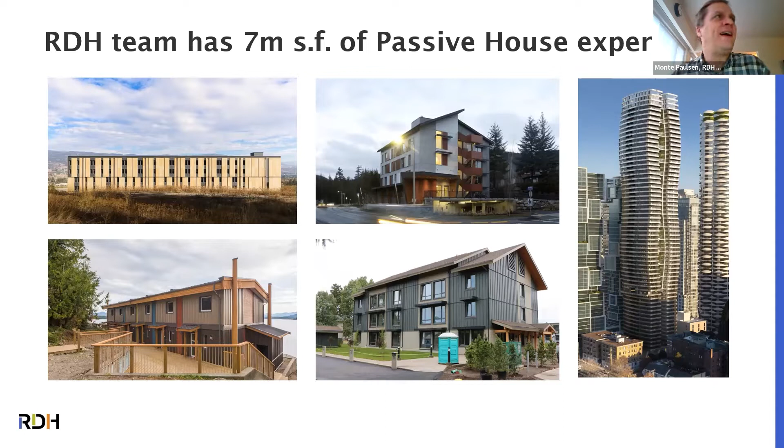As Ken mentioned, we're up to about 7 million square feet of passive house. We've been doing a lot of work over the last few years, and if you'd asked me a couple of years ago, I kind of felt like the work we did on new passive house projects was making a difference around climate. But these last 6 months here in British Columbia have changed my perspective. And I'm really focused on this question of how and why we need to retrofit buildings in a climate emergency. So I'm going to talk briefly about climate, about what's happened here in the last 6 months and what we've learned from that. The core message here is that every building needs a plan. And then we're going to talk about how Stepwise EnerPHit helps you organize a plan if you haven't done this before.

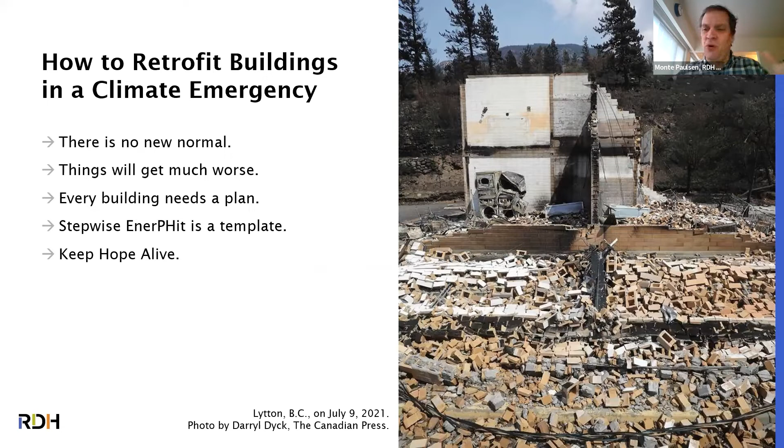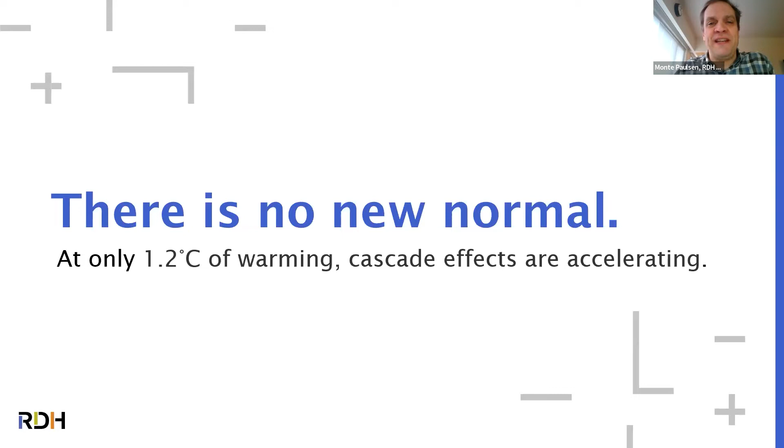If you take nothing else from this hour, there is no new normal. If you hear someone say, oh, this is the new normal, realize they're missing the point. There is no new normal. There is no stable point. This is not anywhere near stable. We are just at the very, very beginning stages of a new geological epoch.

The Earth has warmed 1.2 degrees. Land areas have warmed 1.8. That Earth total includes oceans. And Northwest Canada is warming faster than North America. So let's look at what's happened here.

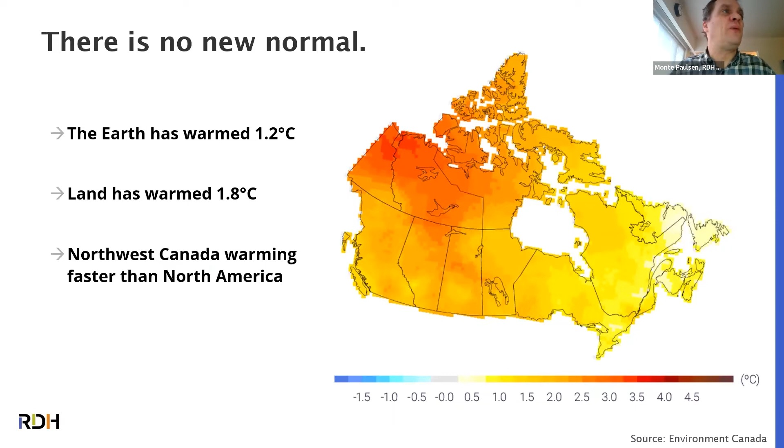It really all started with a little bug for us, and that's how climate things start. The mountain pine beetle started moving in at around 0.6 degrees. We were half what we are now. All that happened was this bug had always been here, but most of them would die in the winter because it got cold enough. They'd freeze in the winter, and a few would survive the next year. But as it got just a little bit warmer in winter, the bugs lived through the winter and started killing trees en masse because they just populated and populated and populated.

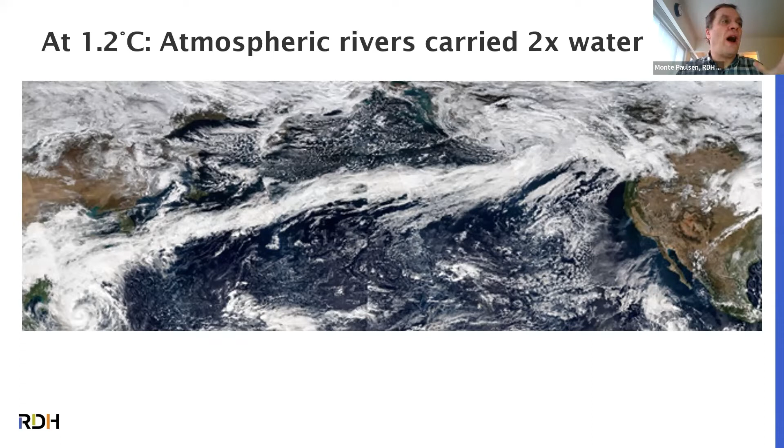This fall, just a few weeks ago, we started seeing much wetter atmospheric rivers. We've always had these weather patterns, this is why salmon spawn in the fall, but they were carrying literally twice as much water as they used to. Why? Because a given volume of air, when it's hotter, around 20 degrees, than down around 10 degrees, which was more normal just a few years ago, can carry twice as much water. And we were setting temperature records because of this, up in the 21s, 22s, huge amounts of water.

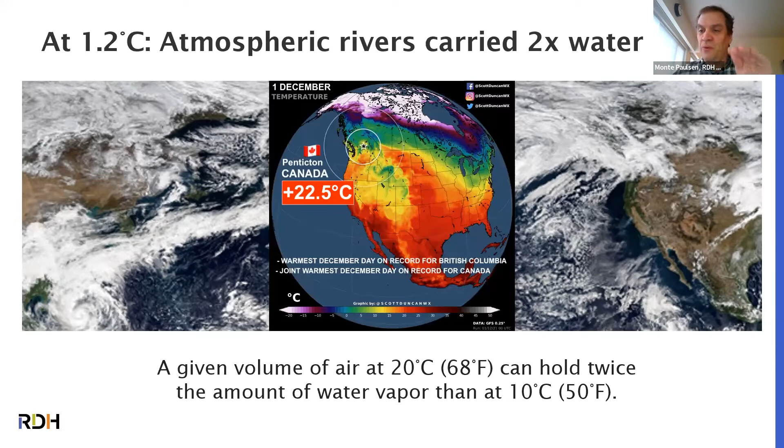So what happened is the water came through the forest that had either been burned by fires or clear cut, and created avalanches everywhere. So there was this connection between the bugs, to the dead forest, to the fire, to the avalanches. And the avalanches were huge.

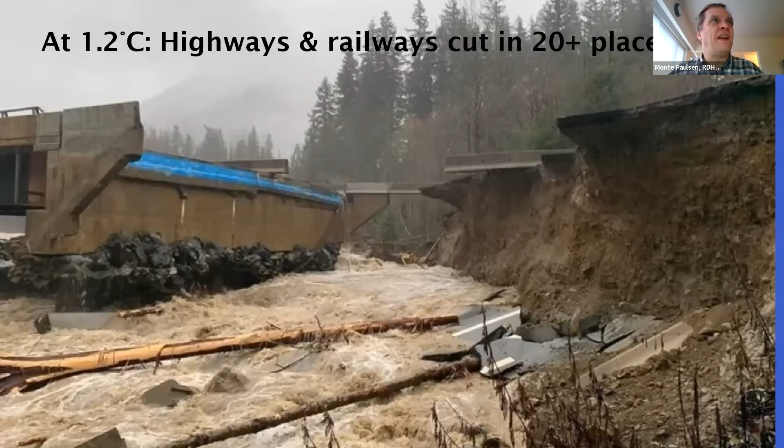We cut all of our roads to the rest of Canada, more than 20 deep cuts like this. This is our primary highway to the rest of Canada. There are dozens of cuts like this. We won't have our primary highway open until next summer at the very soonest, and it won't be a high-speed road. It'll be little makeshift bridges around all of these pieces.

At this point, the only way goods get in and out of Vancouver from Canada is a one-lane road through the mountain. They run about one lane for trucks in one way, one lane for trucks the other way, and they're still not letting private vehicles on.

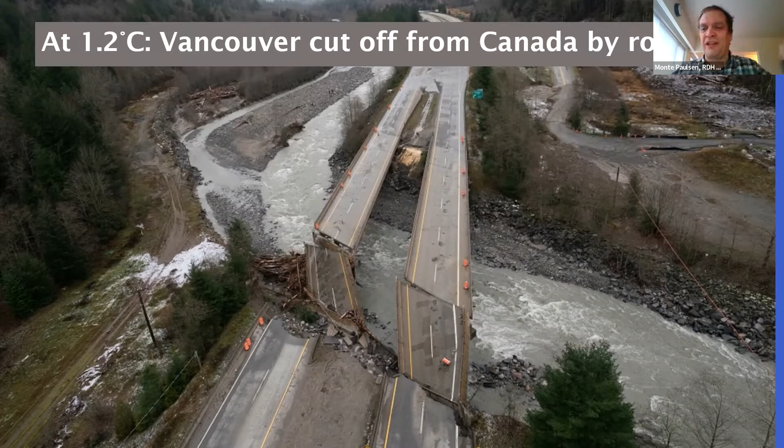And then all that water flows downstream, and the Fraser Valley, which is our primary food area for this part of the world, flooded three times in three weeks, 300-year storms in three weeks. More than 6,000 farm animals died that we know of. We're still sorting and counting to figure out what happened. It's billions and billions of dollars of damage.

And it's funny because the people who live in this region tend to be very conservative, they tend to vote very conservative. This is sort of a middle-class farming community. Many of them don't believe in climate change, but it doesn't matter, they're dealing with it. It doesn't really matter what you believe. The fact is, it's happening to everybody, and it's happening faster and faster and faster.

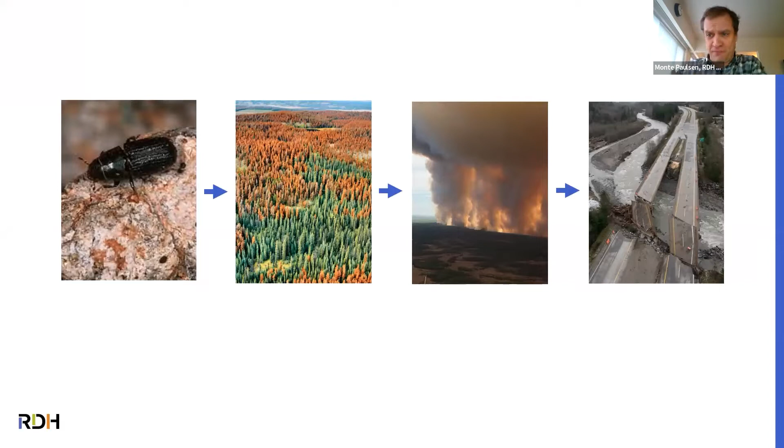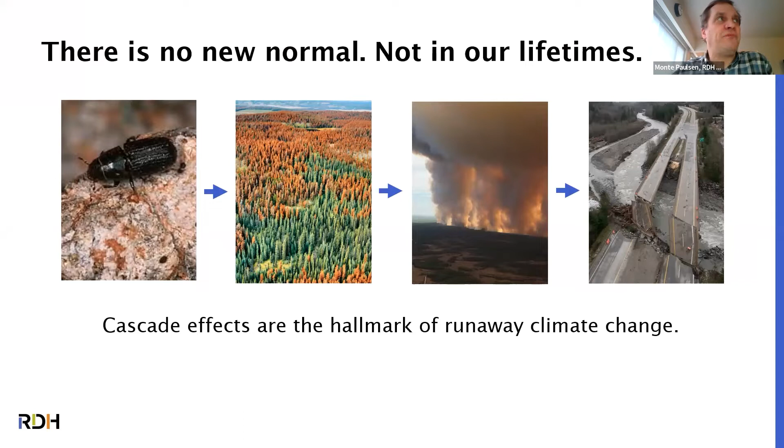So I want you to just take away this idea of cascade effects: bugs to dead forests, to fires, to landslides. This is exactly what runaway climate change looks like. It's these cascade effects, it's not one thing, it's the way they add up on each other. And it's really important to start understanding these cascade effects are running faster and faster and faster. One thing is piling on another, and there will be no new normal, not in our lifetimes.

I urge you to think about what the cascade effects are where you live. These are the cascade effects where I live, and it's worth knowing these, but the cascade effects are different wherever you are.

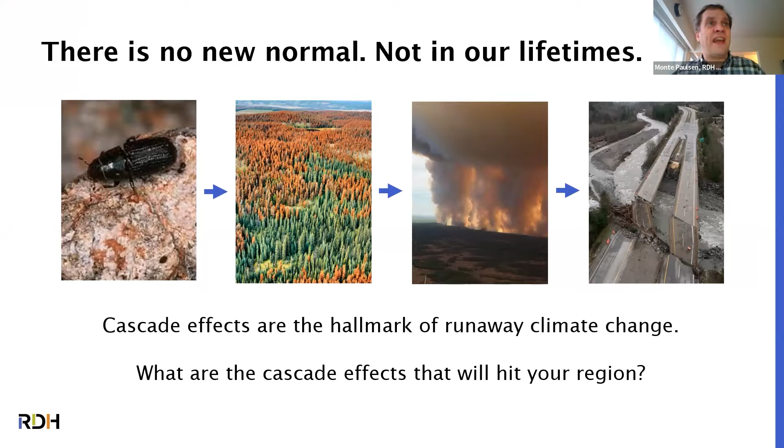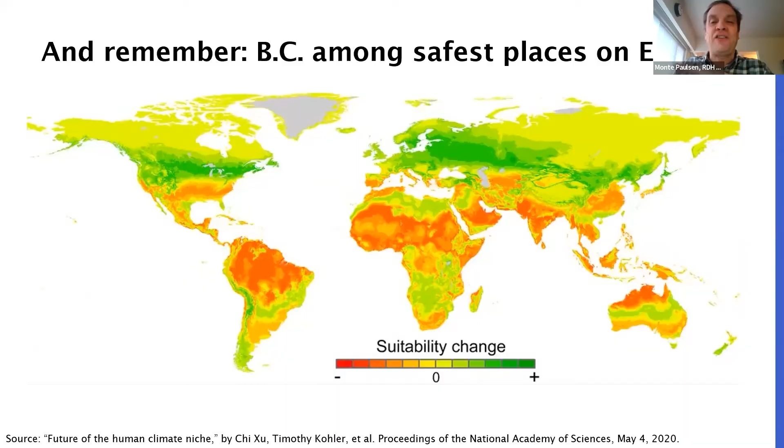And remember, BC is one of the safest places on earth. We have it easy, we are one of the most resilient, long-term safe places anywhere. The vast majority of the rest of the earth, as climate change and the cascade effects happen, would love to have the amount of water that we're dealing with. Roughly 3 billion people will have to migrate by mid-century. So even as I describe this, I'm really aware we have it easy.

Second point: things are going to get worse, way worse. We were looking at 1.2 degrees here in BC, we're headed towards 2.6 degrees or more. The amount of heating we're putting in the atmosphere is equivalent, just for the oceans part, of 5 nuclear bombs a second. By the time we finish this one hour event, it will be the equivalent of 18,000 nuclear bombs of heat exploded in the ocean, just in this hour. That is more than we currently have in nuclear warheads on the planet.

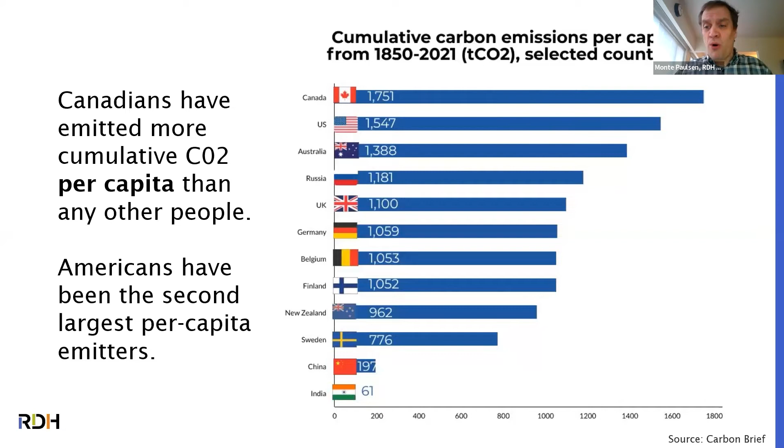And Canadians, Americans are heavily at fault, we have emitted more per capita than any other nation. So when you look at these big global targets you've probably seen, 2030 half emissions by 2030, 2050 net zero, politicians have really grabbed onto this idea of net zero by 2050. Realize it's bullshit. 2050 net zero does not save us at all, it's just been a handy political target.

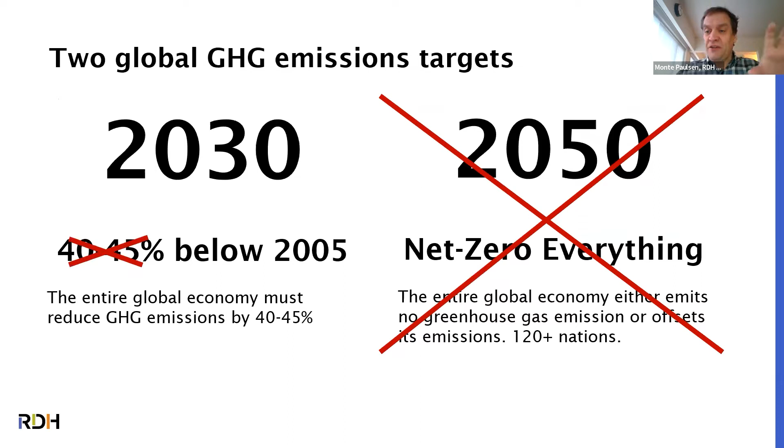And frankly, only 50% reduction by 2030 doesn't save us either. These targets that are thrown around politically, that you're hearing in the news all the time, are nowhere near sufficient. Let's talk about why for a minute.

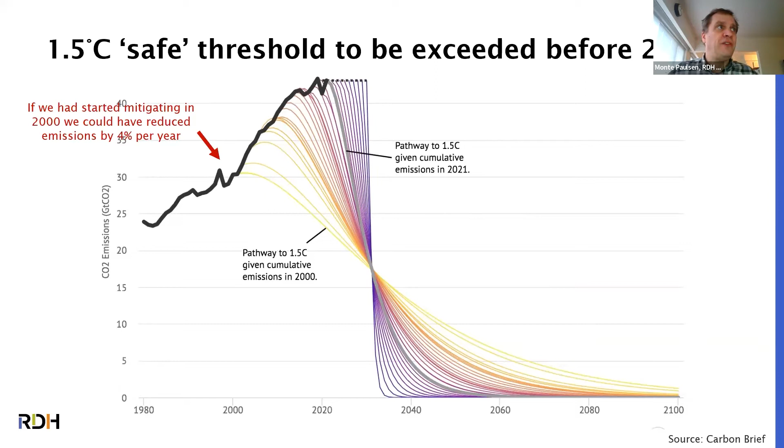If we had started reducing back in 2000, we could have reduced emissions at the rate of about 4% a year. But we didn't do that. We added an extra quarter of emissions in the last 20 years. Things went up faster in the last 20 years than they had prior to that, and they're still going up faster.

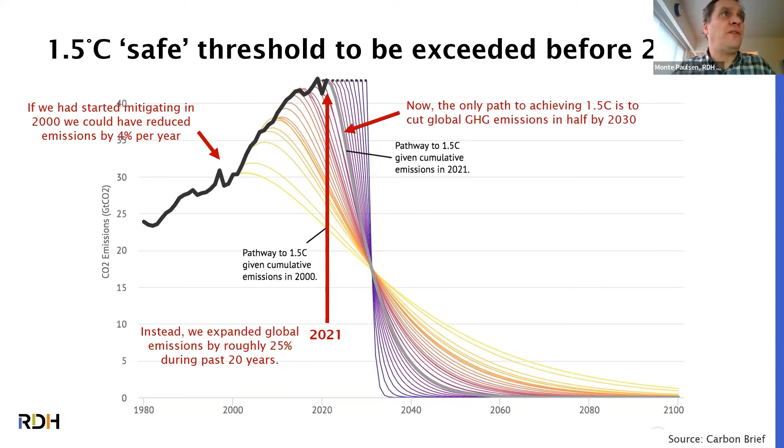So our situation is far more dire today. The pathway to keeping a 1.5 degree warming world involves the steep, steep gray line you see going down there. Each year for the next few years to 2030, that line gets steeper, till the point it'll start to invert. So 2030 is the real tipping point. If we have any hope of keeping a somewhat livable climate, a climate that's just a bit worse than what we have now, that's 96 months away. 96 months to change the world.

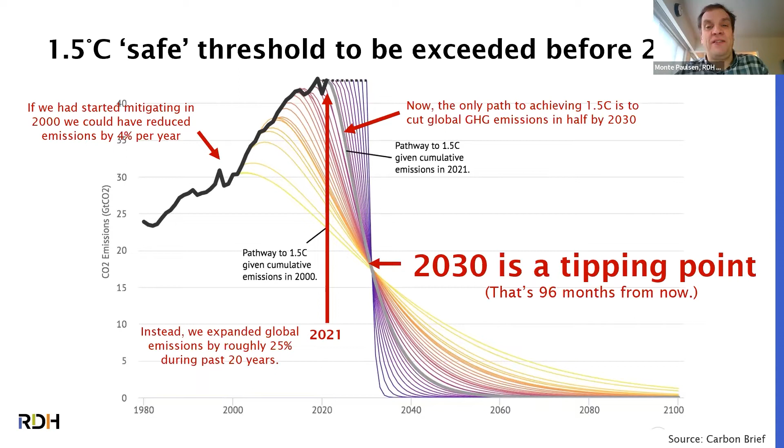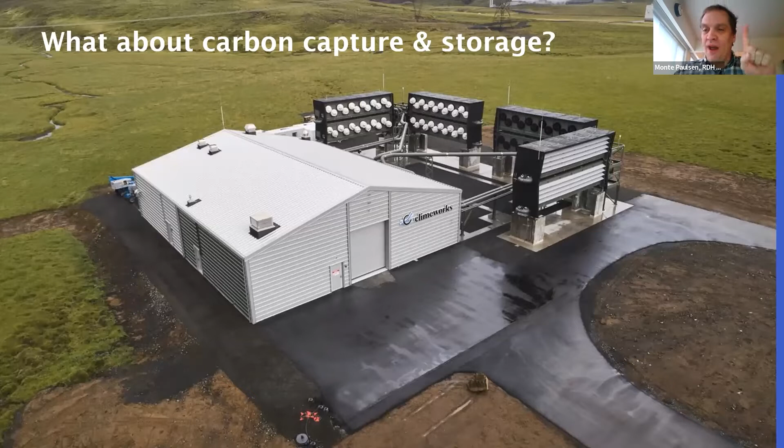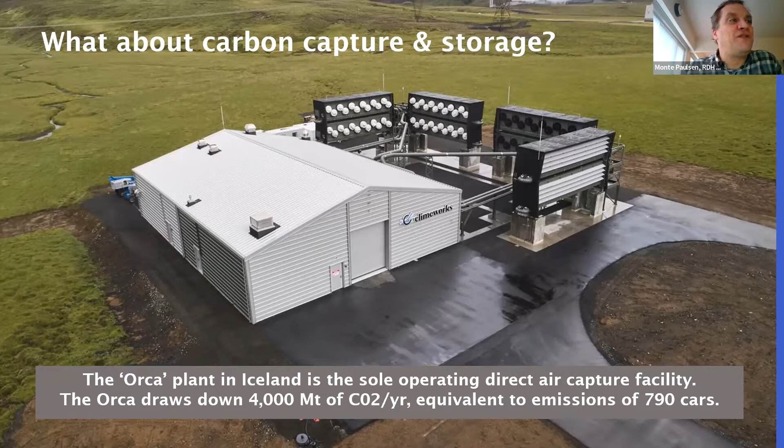Now, some people ask, what about carbon capture and storage? It's true, there are scientific ways to do it. This is it, this is the only plant on Earth that does it. We have one, grand total of one plant. It's a really cool plant, in Iceland, run by a great company doing some fantastic engineering. But we could never build enough of these to capture those atomic bombs worth of heat we're letting off every day. So it's definitely a technology worth exploring, but literally one plant that can do the equivalent of 790 cars is not going to save us.

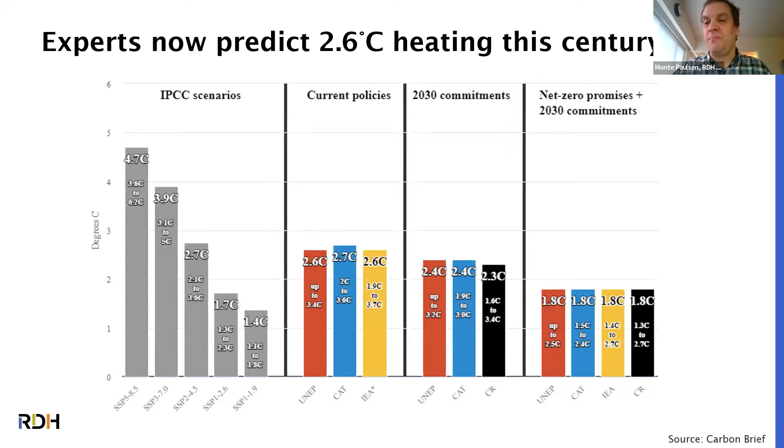And so experts, after the COP meeting a few weeks ago, are now predicting about 2.6 degrees this century, based on what we understand now. That's the most reasonable target of the moment. Really depends on what happens in the next few years.

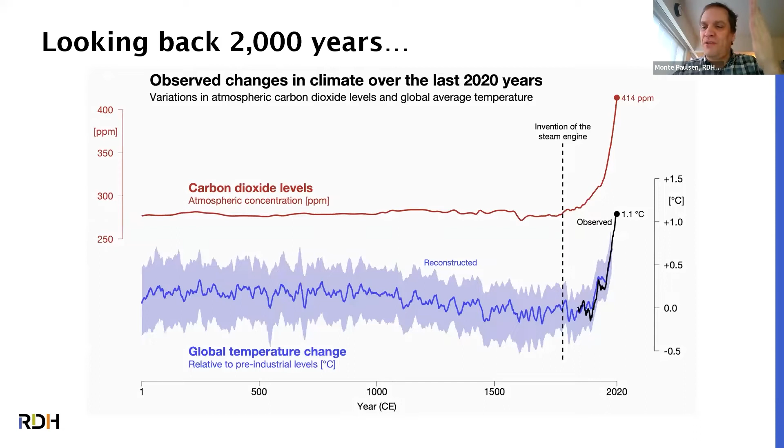You've seen this graph where carbon dioxide levels and temperature start to shoot up, the so-called hockey stick graph. Just before we get to retrofits, I want you to look at this graph longer term with me. So this is the same graph. Right here on the right is now. We're making these steep rises. This is civilization as we know it, the last 2,000 years or so.

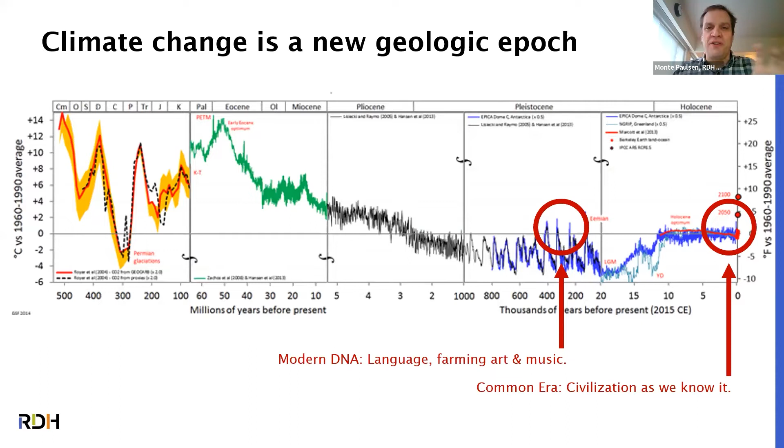Back here in the Pleistocene is when modern human DNA arrived. You could take their DNA and our DNA and match it. It's when language emerged, farming emerged, art and music emerged. Many of the things we think of as civilization happen around this time. And back here in the Pliocene was when early ape-like ancestors, not quite humans, started living in groups and using tools in ways that mattered.

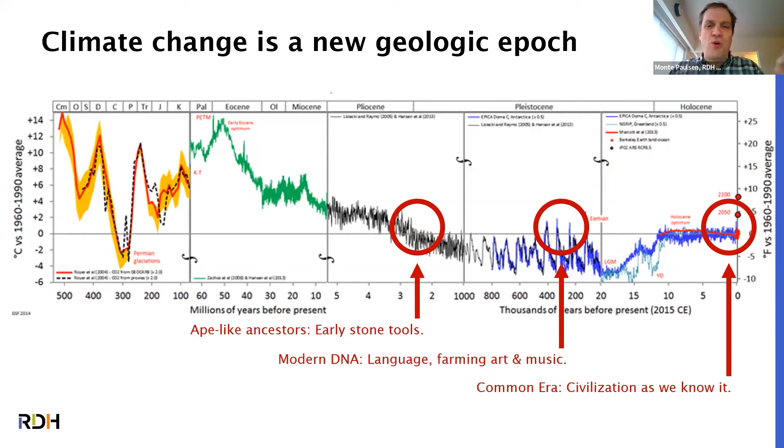Note that through all of that time, the temperature was about the same, or a little bit below where we're at now. There has never been a human alive on a 2.6 degree hotter planet, ever. If you look at that line that's about 2.6 degrees, you'll notice everything before that was before there were any humans. So if you hear people say, oh, the Earth's been hotter before, yeah, but never when humans lived here. We have no idea how to live in this environment. The entire time it was like that, there was nothing remotely like us as mammals on the planet.

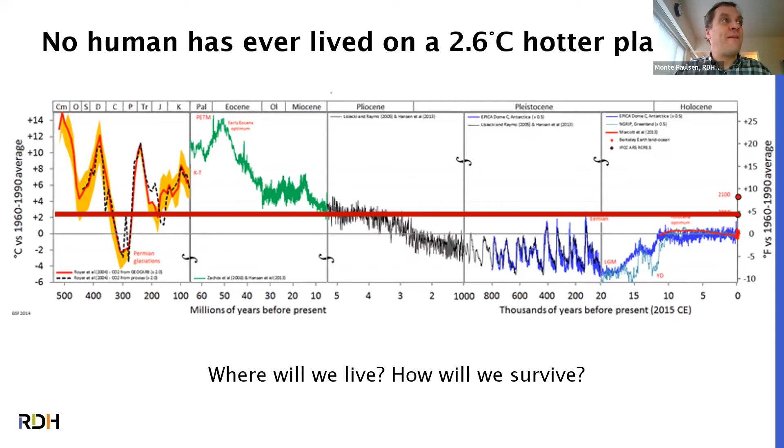So the real question is, as we go through this, as we approach 2.6 degrees, or perhaps worse, go past, how are we going to live? How are we going to survive? How are we going to make it? And that's why every building needs a plan. We actually need to think of buildings as survival shelters for an incredibly more dangerous world.

There's two concepts to take away. Most of you have probably seen it, but adaptations: buildings need to shelter people on a 2.6 degree or greater planet. And mitigation: buildings need to emit nothing, nothing to prevent a 2.6 degree planet.

Our premiers, like our premier here in British Columbia, said, oh, when these floods happen - this is a guy, nice guy, I like John - these are extraordinary events, not measured, not contemplated. The problem was his own government issued a report in 2019 that contemplated and warned about these exact cascade effects. They said what happened, the cascade thing, is exactly what they told us would happen. They warned us specifically about wildfires and smoke, extreme storms, overland flooding, sea level rise, and overheating. Exactly what we've seen has been warned about.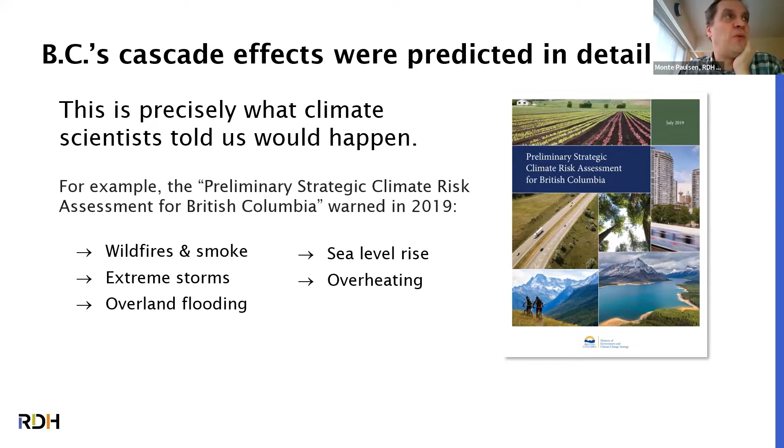Again, I'd urge you to study and figure out what the cascade effects are in your region. And here's the thing: architects and engineers are legally responsible.

We can get sued. We've been warned by the government. Our own engineering associations have said climate change imposes a new and evolving pressure on the standard of care. Specifically this year, there's a climate change action plan by engineers here in British Columbia that says registrants are expected to consider the impact of their work on the climate.

So here's the point I'm trying to make. Politicians in both countries can pretend they didn't know - oh, what happened, didn't know that was coming. We can't. We are legally responsible, those of us who work in buildings, and we need to consider our legal liability as well as the survivability of our buildings.

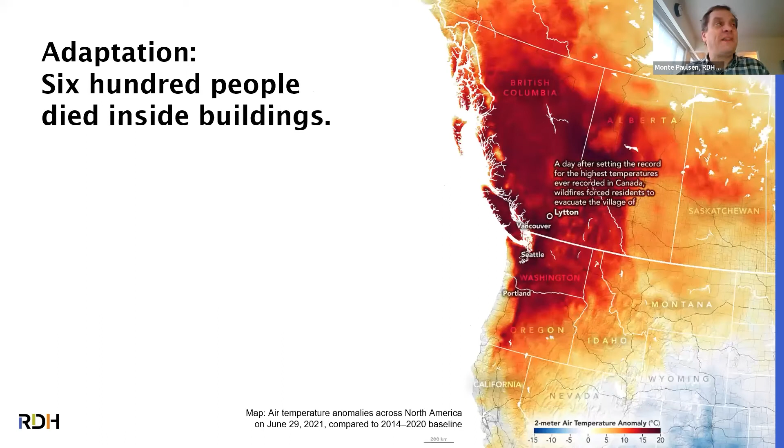So let's talk about that directly. In that town of Lytton, when it burned, those same few days we call the heat dome of 2020, we had a record high of about 49.6 C. I think that's in the range of 120 F - I'm sorry, I can't do the number conversions in my head.

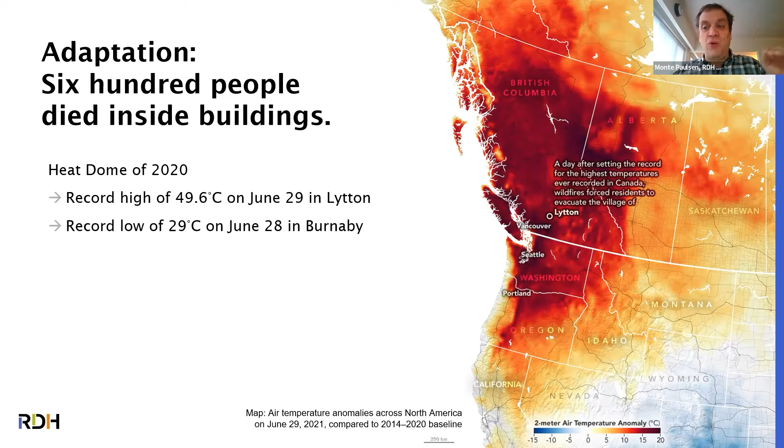More importantly, our lows didn't go very low. So as the lows stayed high, our buildings didn't cool off at night, and they just built heat for 2 or 3 days. There were approximately 600 people who died from heat-related causes - the coroner determined this was a heat-related death during that time. The vast majority, more than 90%, were seniors, and 99% of them died in their own homes, the rest in places like hotels or police stations.

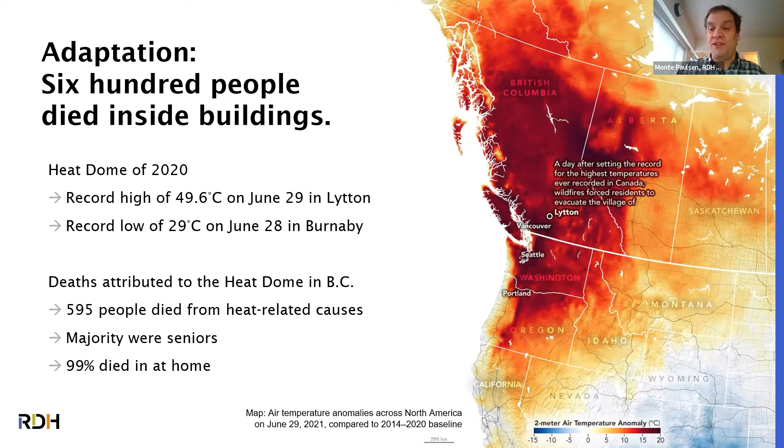So people were dying at home during this heat wave. The possibility for legal liability going into the future, where as we build buildings, people literally go home to seek shelter and die, is very real.

And what we know is that there are at least 6 factors that affect overheating, and we tend not to look at them. It's about solar gains, of course - we talk about that a lot at Passive House - but the temperature outside matters too. And we need to model everything for 2050 and 2080 climates.

The urban heat island effect is very real, and we tend to build multi-unit housing in places that have more urban heat island effect. As we build smaller units, the occupant density creates more internal heat gains per square foot or per square meter of building. We also have more and more losses from these aggressive domestic hot water systems and other mechanical systems.

And we have these huge lifestyle variations. Some people have these huge gaming machines in their apartments that put out 1,000 watts per unit in real time, completely changing the energy balance of those buildings. We need to be looking at all of these factors.

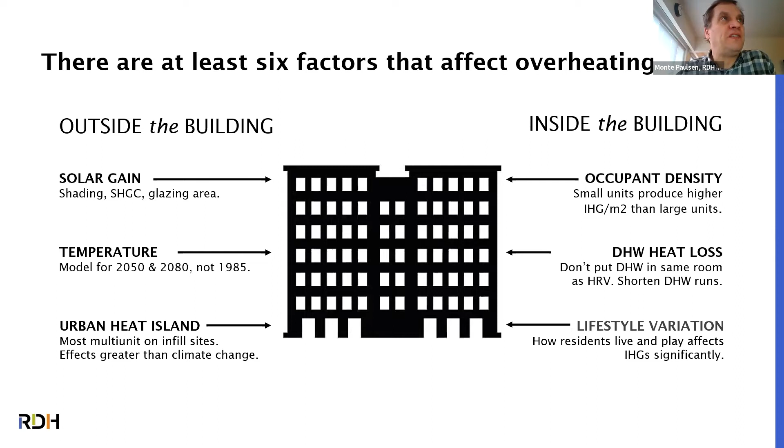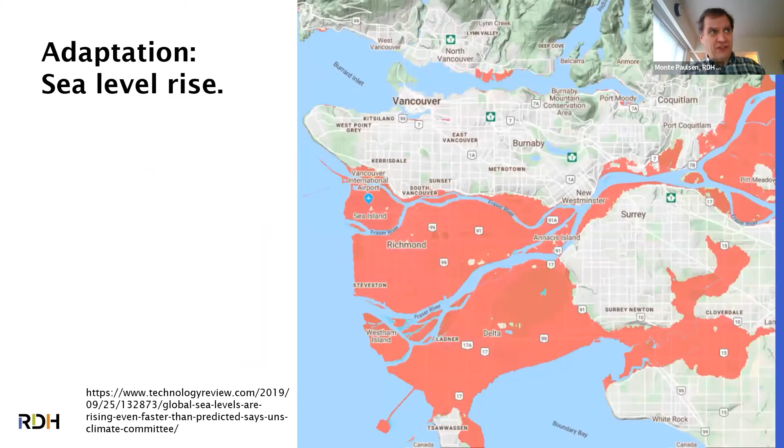And of course, sea level rise. This is what it means to my area, Vancouver - huge storm surges in a few more years with 1 meter of rise. But frankly, places like Boston and New York are looking at far worse sea level rise scenarios.

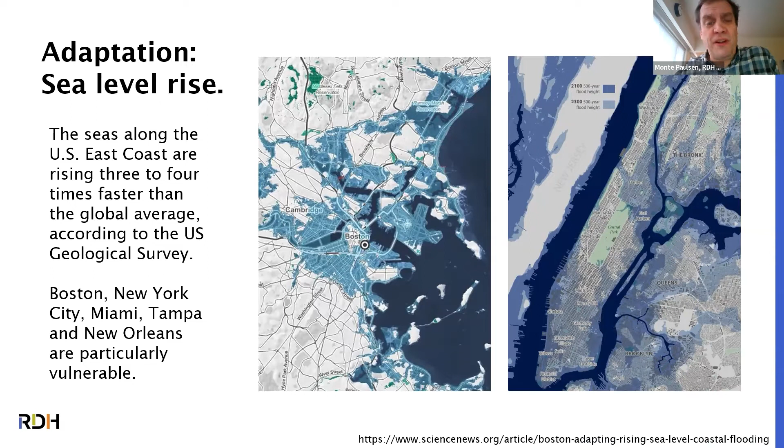And it's going to change all of our thinking about where we build and what we build. Parts of our cities are going to have to be abandoned, and we're going to have to build new places elsewhere. And then we're starting to see governments react - we're a little bit fortunate here in BC that our government is reacting a bit more proactively, though still not enough.

So we have this Clean BC plan that says by 2030, any heating device of less than 100% efficiency - meaning boilers and furnaces - will not be legal. You won't be able to buy one, new or used, after that point. So every building is going to have at least electric assistance, if not some form of heat pump, by 2030.

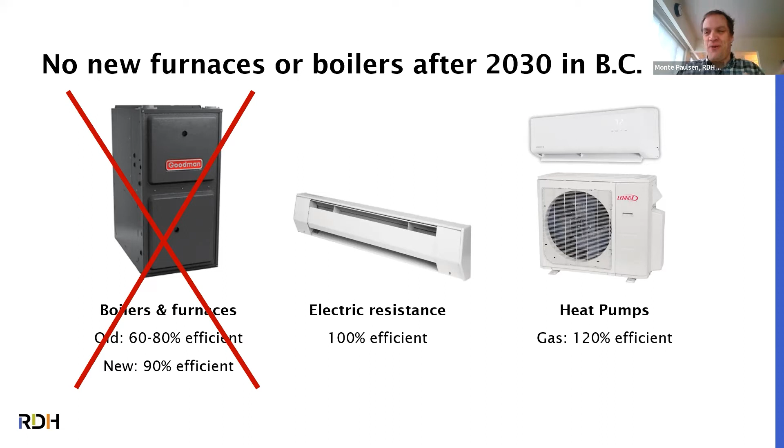Or from the point of view of an investment landlord owning an apartment building, that's $9 a gigajoule that could go to improving the building, putting on an enclosure retrofit, electrifying heat pumps. That's an annual cost that can be amortized into repairs.

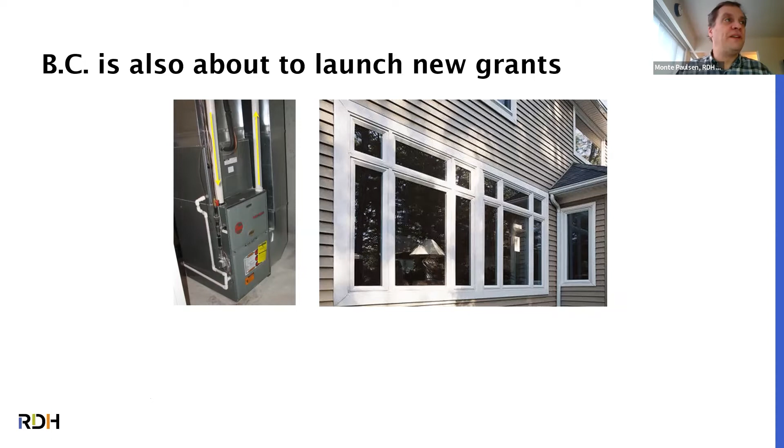And then here in BC and across Canada, we're about to launch a whole bunch of new grant programs for homeowners as well as for larger buildings. We need to be worried, though, that the last program didn't work out so well.

In the last program, we had a lot of furnace installations of low quality that didn't actually result in great savings. We had lots of windows that were double pane, often poorly installed, and those were most of what the grant funded. A lot of the other parts of the program didn't get much uptake.

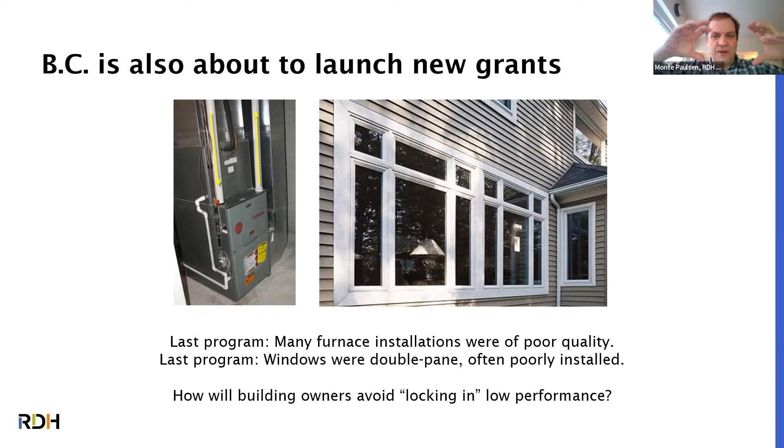So as we work with building owners now, you have these climate impacts, you have cost, you have the fear of locking in low performance, you have the carbon tax. Put yourself for a moment in the shoes of a building owner next year.

You have these continuous cascading disasters. At the very least, it's going to affect your insurance costs, if not actually wiping out part of your building or causing you to rethink your portfolio and maybe sell some properties and invest in others.

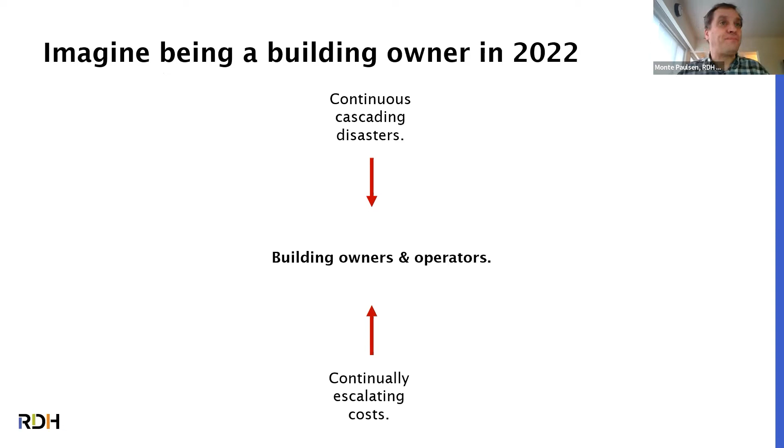You also have continual escalating costs. Our construction costs have been going crazy, and it's just more so now that our supply chain is largely interrupted. You have continually changing code requirements, different steps being introduced every year between now and 2030 moving forward. You have continually changing building technology.

One of the great things about the Passivhaus communities is we're always talking about new systems of panelization and new heat pumps and new ventilation systems. But to us, these things are kind of exciting. To building operators, it's just overwhelming - oh my God, what about this new thing?

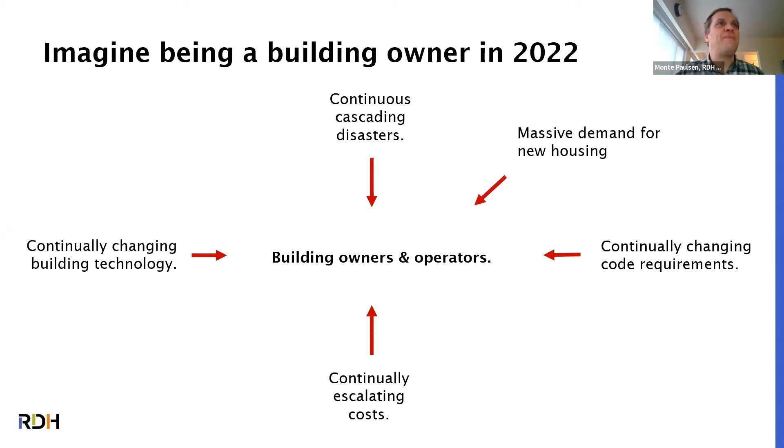You also have massive demand for new housing, and what housing is worth is spiraling upward radically, which does create capital, but also challenges.

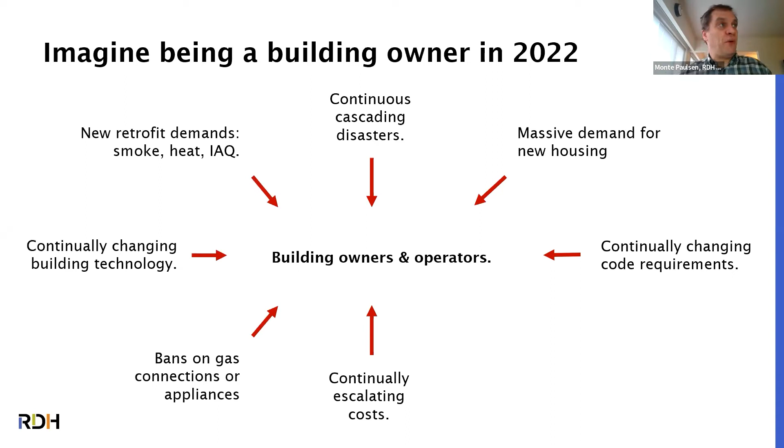The bans on gas connections or gas appliances work differently by different state and province, but the pattern of more restrictions on new gas is fairly consistent. You have these new retrofit demands: smoke, heat, indoor air quality. And at least here in Canada, you have this Canadian carbon tax that you can calculate into your expenses going forward.

It's mind-blowing. How is an owner who also has to rent the suite and pay the mortgage and take care of all the normal business - that's a full-time job for building owners and operators - supposed to consider all this new stuff? And they're realizing they have to consider it really, really quickly. They don't have a 20-year, 30-year window to think about this.

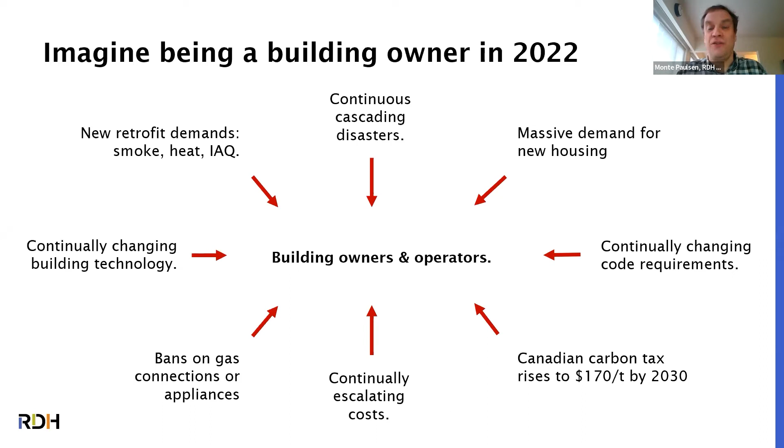So every building on Earth, somewhere in the vicinity of 5 billion buildings, needs a climate retrofit plan. And of course it's unique for every building, but the key message here is we all need a plan.

These plans need to consider flooding scenarios. Does it not apply to this building? Are you going to lift the building? Are you going to sell the property?

Realize a lot of the people in the interior in BC thought they were free from flooding because they're far from the ocean, but didn't realize that all the upstream fires and clear cuts put them right in the path of landslides. We need to model every building for current and future climate to look at all 6 factors.

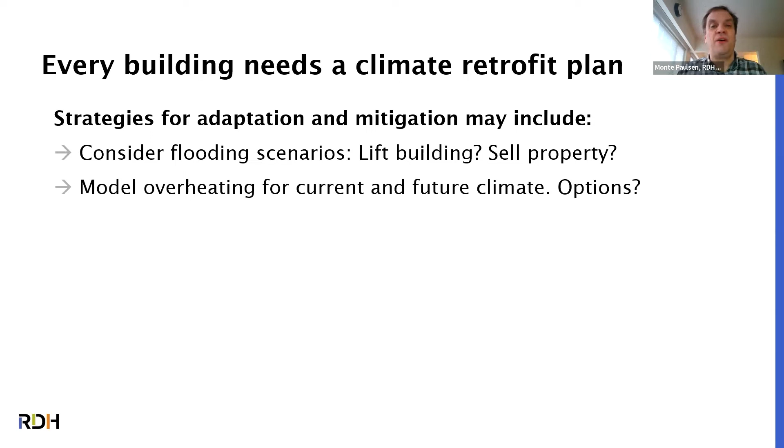Of overheating, and then be thinking about how is this building going to adapt over time. What systems are there? What needs to be renewed? Do buildings need shading? Do they need cooling? We need to measure indoor air quality and outdoor air quality, and then retrofit ventilation and filtration on every single building.

We need to talk about mitigation. How do we get to zero emissions? Not net zero, but zero emissions in buildings by 2030.

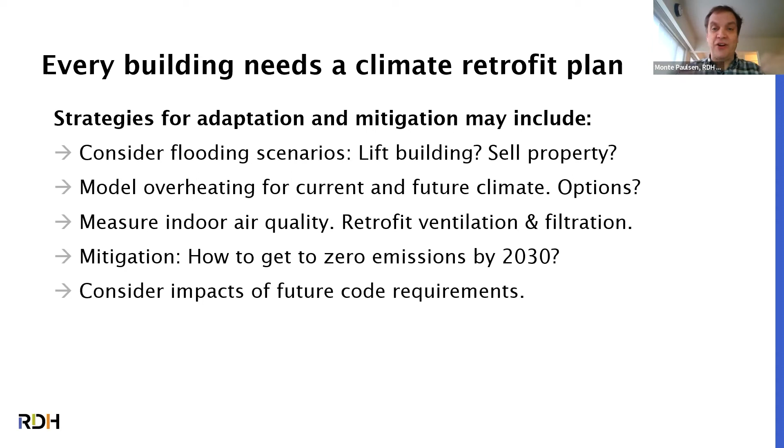We need to consider the impact of future codes that are changing quickly, and it's hard to juggle and keep track of everything. We need to consider the impact of things like the carbon tax in Canada, and I hope someday soon you'll have a carbon tax in the US or some other cap and trade system that actually has teeth. And how much capital is available and when.

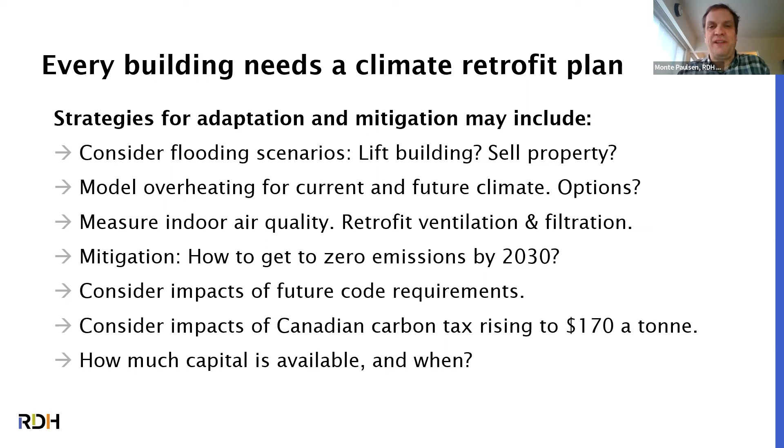This is what a climate retrofit plan needs to consider at minimum, plus the needs of the building and local zoning. We've been doing these kinds of plans at RDH and other firms for several years.

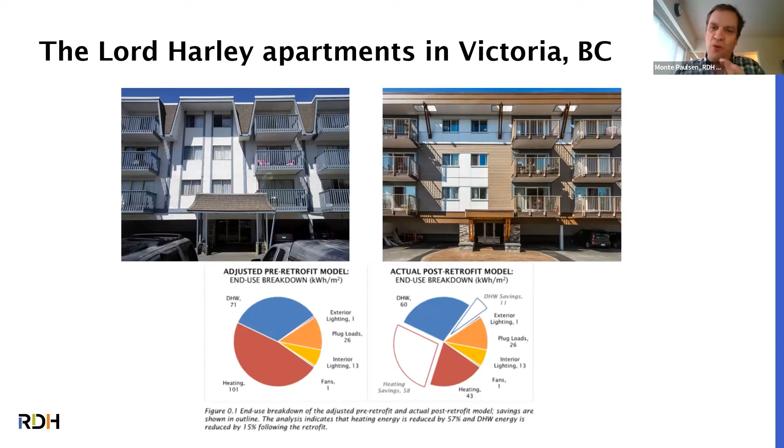The Lord Harley Apartments in Victoria is one where we did this kind of retrofit. It wasn't quite to EnerPHit level, but we saw these major pieces.

We're getting calls more and more from major landowners such as Minto in Ontario to assess their portfolios, to look at their buildings and say, great, what do we want to retrofit, in what order, and to what standards? Frankly, we have spreadsheets and systems we work through, but we can't do 6 billion buildings. We need everybody engaged in this, and we need everybody to invent their own system right now.

So I urge you to take a look at EnerPHit. I want to talk for a few minutes about what it looks like. It's a tool for helping building owners plan for mitigation and adaptation. Let's not even focus right now on whether or not you hit the PHPP target—use the tool to plan for these circumstances. More than 5,000 buildings have been upgraded using the EnerPHit approach.

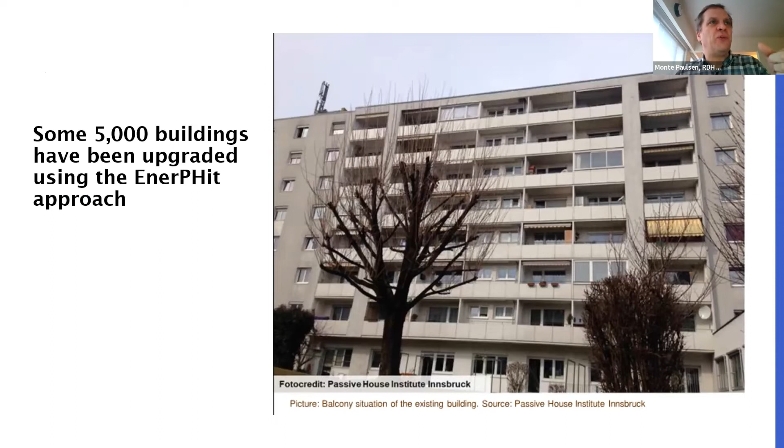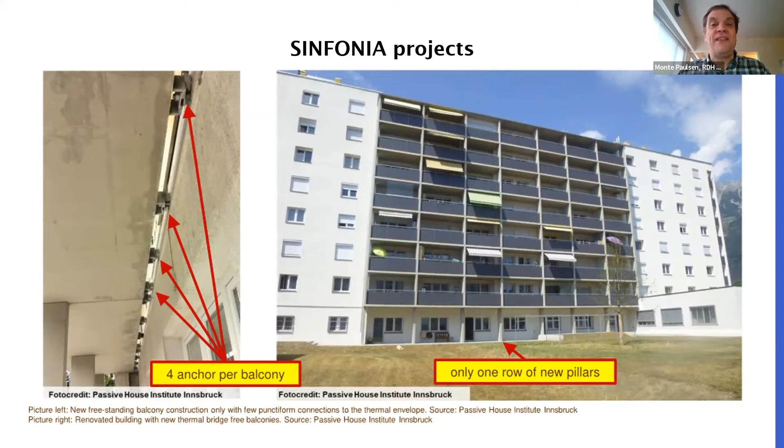One of the great tranches of buildings is a project called Sinfonia, with quite a few projects in Austria. I urge you to Google that and look at them. This is one of these buildings before, and this is one after. Notice they actually cut off the balconies to minimize thermal bridging, putting them out on little supports. If you Google Sinfonia, there are several presentations—I think some on Passive House Network, but certainly on Passive House Accelerator and at some conferences. They are great prototypes for larger buildings doing these retrofits, and they've learned lots of lessons about how to retrofit buildings with people in place.

Overall, the way Stepwise EnerPHit works is you start with the original building. You then sit down with the team and develop a plan. You go through all those pieces we just talked about and figure out where the building needs to end—what's the end point building that's going to have everything we need by 2030 or 2040? That's your overall plan.

You would typically run that plan and break it down into steps, either because of government incentives, electrification requirements, cash flow, or some critical need in the building. So for this building, we're going to do cladding first; for that building, electrification first; for another, these steps in this order. It won't be the same for every building, but there's a logical sequence that allows capital to flow in more slowly and disruption to tenants to be better managed over time.

You work that plan out and send it to a certifier, who says, yes, if you follow that plan, at the end I will certify this building as EnerPHit certified. Then you proceed through the steps, and you can put a plaque on the building at around 25% improvement, and keep going. Even if it takes 10, 15, 20 years to reach the final stage, you make sure you don't lock yourself into corners—you've created a master plan with logical steps to get there, and you proceed through those steps as makes sense.

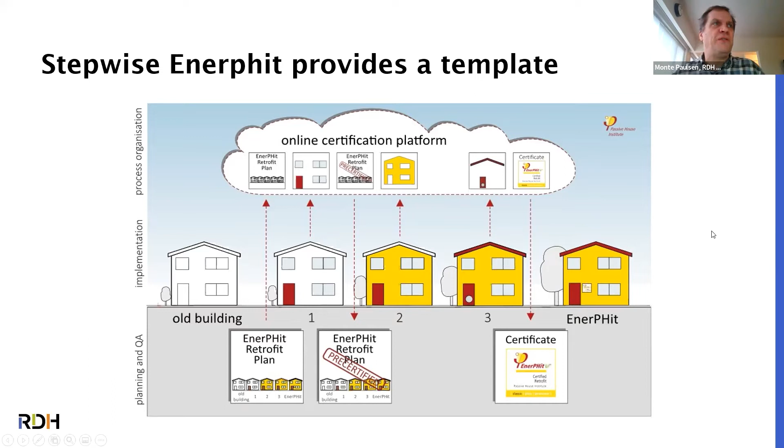One we call the component method, where you look at your climate. If you're in a cool temperate climate, you simply make sure all your walls and windows hit or achieve this level of efficiency—that's the kind of climate region for PHI. If all the components meet that, along with air tightness and a few other requirements, even if your modeling isn't perfect, you can still achieve EnerPHit certification. The component method has worked really well these last few years in Europe because there are many, many passive house components on the marketplace, and as component supply improves through new construction projects, it's increasingly feasible in North America as well.

The other method is the energy demand method.

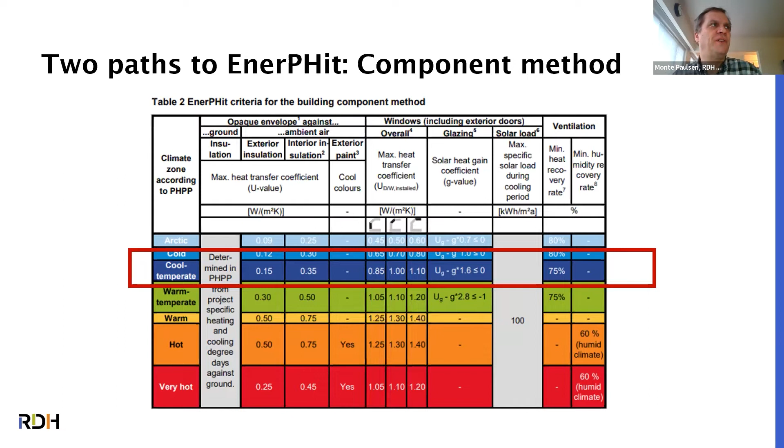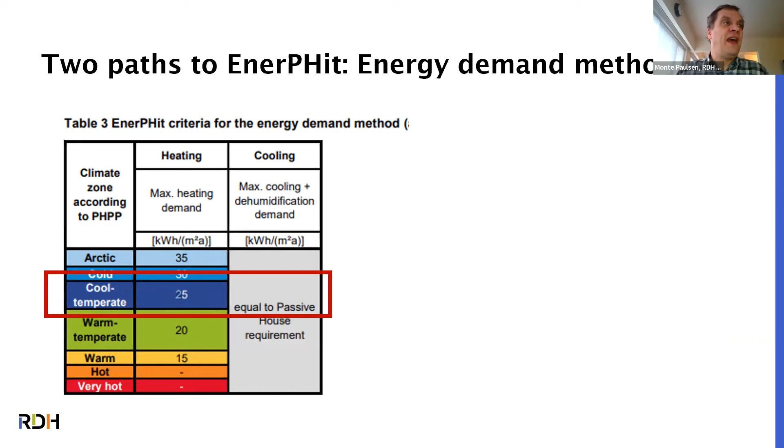You model it just the same way you would a new building. In new buildings in PassivHaus, we're trying to achieve 15 kilowatt hours per square meter of heat loss, or 4.75 kBTU per square foot per year. In a cool temperate climate, the EnerPHit target is 25. It can be a little lower in warmer climates and a little higher in colder climates. You simply use PHPP as you would for any building and model to that.

Both methods also require air tightness and a PER demand limit. So once you have your endpoint in PHPP, you use the variant functions in PHPP—I'm sure PassivHaus Network has PHPP training, and we ought to have training just on variants, frankly, how to use them well. Ed May would be the perfect person to lead that, I might add. Variants is a tool where you can create multiple versions of PHPP without having multiple files, and you can change a few things.

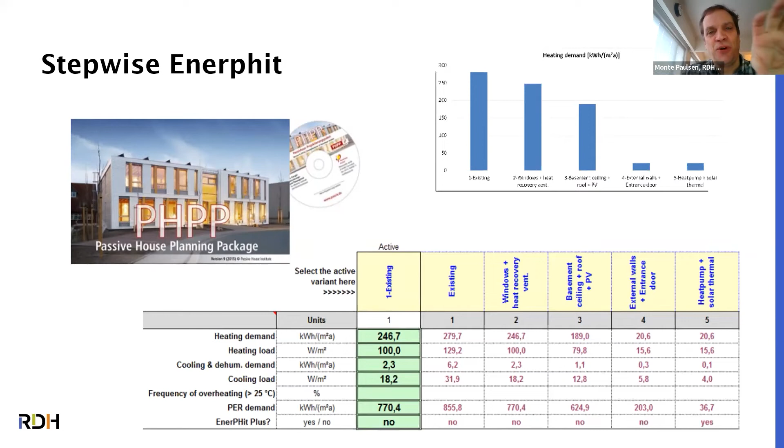You use the variants tool to lay out the steps you developed with the owners and operators of the building. You say, first we're going to do heat recovery ventilation and windows in this model, then ceiling and roof and PV, then the exterior walls, and last it looks like there's a heat pump. You can see how it gets down to its target over those variants, and you do the detailed work in PHPP—every step is there, and you might go back and forward.

Then you pull that out of PHPP into a sister program, which is just another Excel file—PHPP is Excel if you haven't used it. It pulls the variant piece out, and you can start elaborating on it and working it into a plan. You're translating the energy model into layperson speak for anyone else to read, breaking down the steps, and you might tweak them a little bit.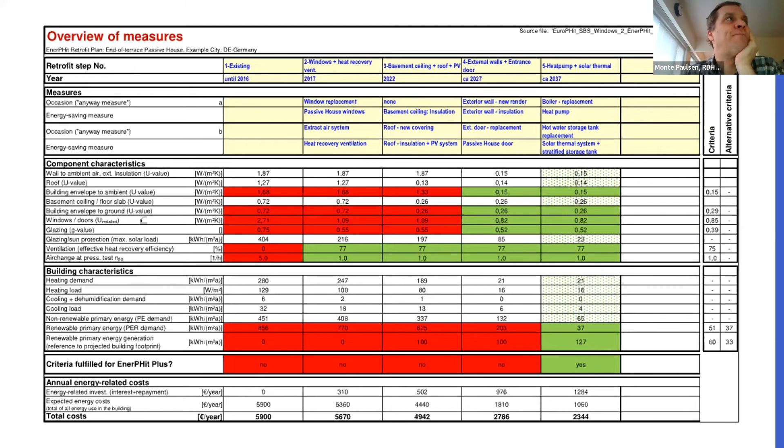You would look at the maintenance costs and investment costs for these. I think that's another great thing the PassivHaus regional networks could do, Ken—develop by region: here's what our energy costs are, here's what our approximate costs are for these kinds of things, as standard inputs, because people shouldn't spend a lot of time trying to guess this. It's meant to give you a kind of ballpark look.

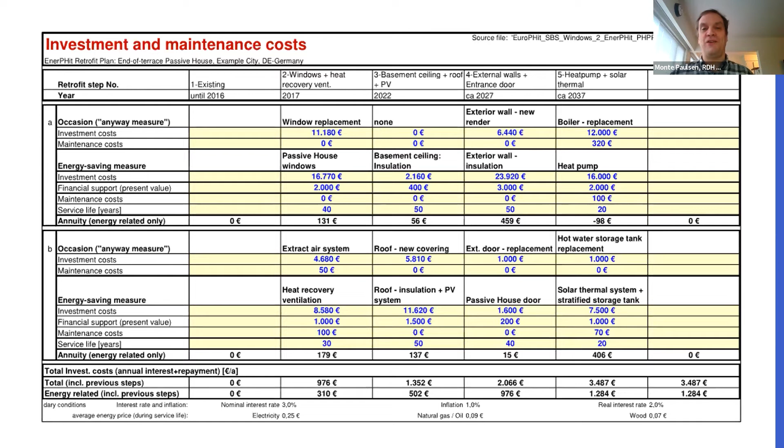This gives you the ability to work with the owner and understand the cost implications, both at the front end, but also what am I going to save? When am I going to start avoiding the carbon tax? When am I going to have a boiler in before I can't get a new boiler?

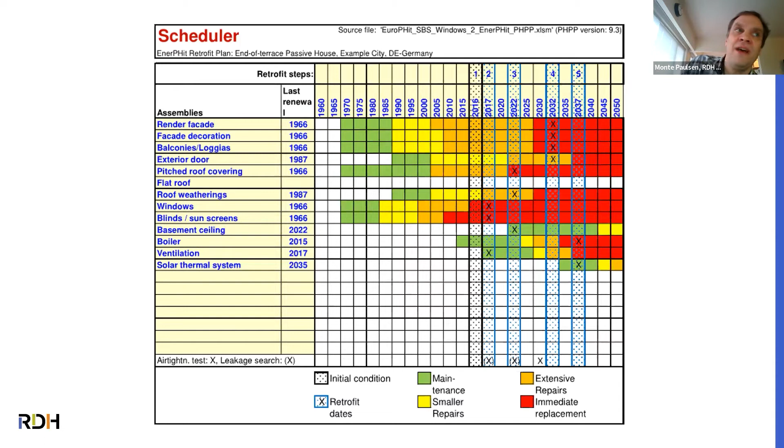Then that flows into a scheduler document—again, part of this template that runs alongside PHPP on your desktop. You start to move things forwards or backwards a little bit. Here's maintenance things, here's repairs, here's replacements. You can start to see if there are any impacts for one thing or the other—there might be local supply issues or a sale on something that causes you to move something up or down. The schedule is a live Gantt chart like any project, but it stretches over 10, 15 years into the future.

All of this gets rolled up into an EnerPHit retrofit plan that shows this stuff—a template that explains these pieces. It's the PHPP plus that plan that gets approved by a certifier who says, yeah, that makes sense to us. You can modify it over time, but they're agreeing that if you do this, they will essentially pre-certify it—they'll say if you do this, we'll certify the thing at the end.

This notion of a template or a form is the same thing companies like RDH, who do lots of deep energy retrofits, use. We have our own tools for this kind of thing, but EnerPHit is free—you can just download it and start it on your own project now.

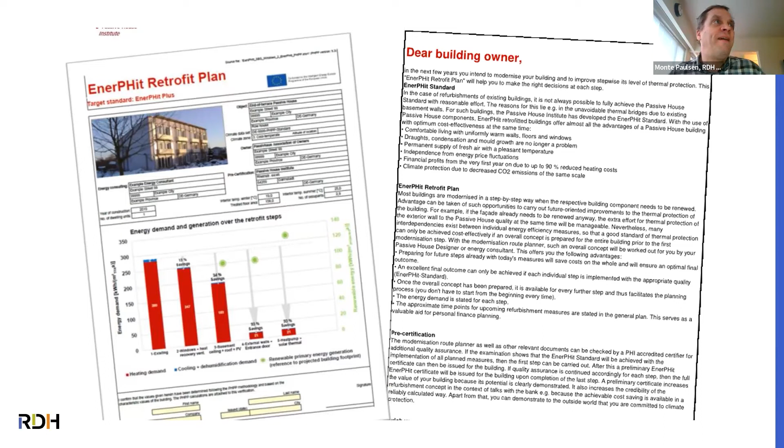So again, you've got the old building, you develop a plan, work it over, break it down into steps, and analyze those steps for cost effectiveness and timing effectiveness. You take that package to a PassivHaus certifier who might give you some feedback and advice, and then off you go. When you complete 25% of it, you can put a plaque saying EnerPHit in progress, and when you complete it, you have a final EnerPHit house—giving you this confidence, for a large building or apartment building or whatever it is, that you're really there.

You're not going to have another retrofit. I mean, one of the things that could happen right now in BC is if a building retrofits to meet some of the targets that are coming out in the next couple of years from the province, they might have to retrofit again after 2030 to meet other targets that are still emerging.

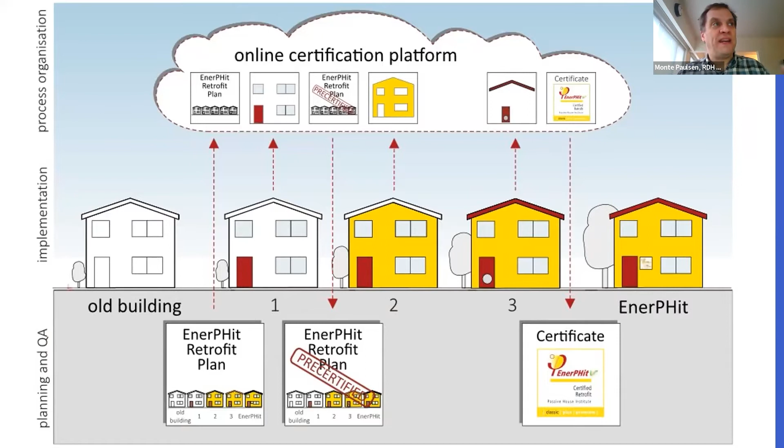Whereas when you go to a standard like PassivHaus or EnerPHit, you're there. There's not going to be any need to go a second time or go further. You can rest assured that building is functional, durable, resilient, fairly well adapted. EnerPHit doesn't require some of the adaptation targets, we're adding those because of our perspective now, but it gives you a format to organize the adaptation and mitigation targets really clearly.

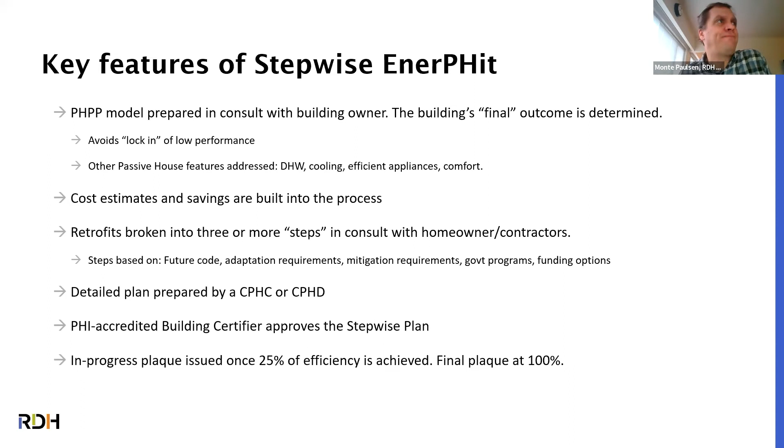I'm going to show you where you can get more of this information later, but it was a really typical suburban house. It was early in this cycle of 2017. There were still early supply chain issues here, so they had less choices than they would have now, but it was relatively easy to do for a contractor without a lot of passive house experience.

The largest project currently underway in Canada that's almost finished is the Soble Tower in Hamilton, Ontario. There are a bunch of presentations by ERA architects that I urge you to watch. You can probably find them on Passive House Network and Passive House Accelerator or other places. If you Google around, there's several presentations about this building, so I'm not going to spend a lot of time on it now.

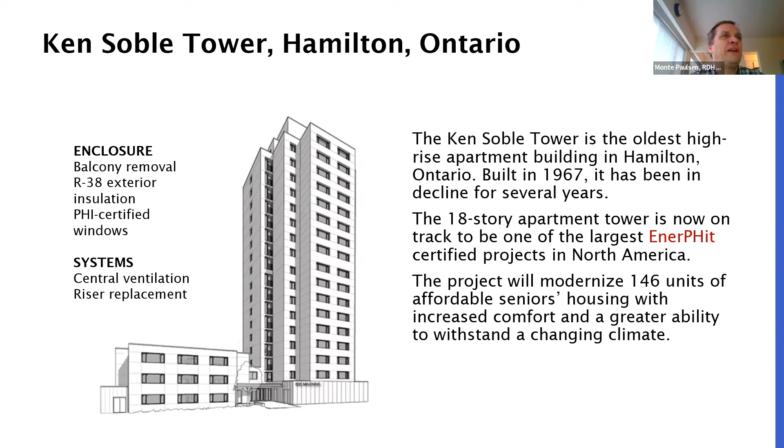But note that this was the classic thing. In 1967, it was a super happy family place, at the very early golden days of social housing. It had a lot of wear, particularly the balconies had a lot of wear. The balconies were not retainable.

There had been so much spalling right where they connect, and this happens on a lot of balconies in cold climates, that they were either going to be upgraded or removed. And this is probably the biggest issue for retrofitting taller buildings, is what to do with balconies. There's only 3 choices.

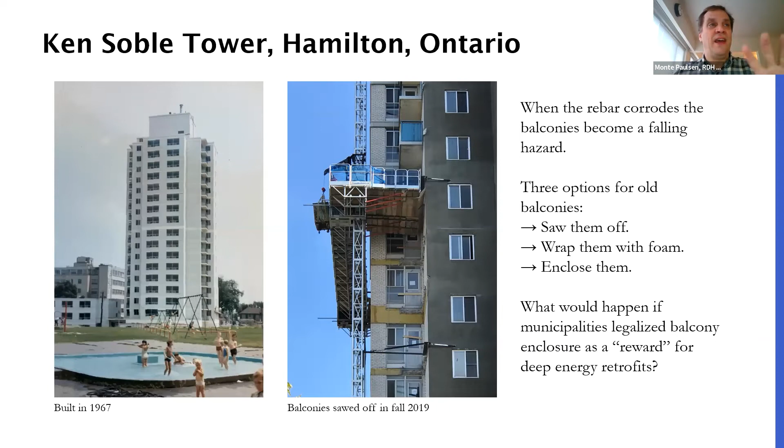You can saw them off, you can wrap them with foam, or you can enclose them and bring them inside. There are pros and cons to each approach.

On the Hamilton building, they were all sawn off. New fiberglass triple pane windows were put in, new exterior insulation was put on, and the building is nearing completion now. I urge you to Google it: Soble Tower, ERA Architects.

If you have questions, it typically lists the CPHD or CPHC or architect of the project, and quite often you can just email them and say, hey, I really have this question. Keep it short, but you'll be surprised at how giving people are within this community.

So if you want to see examples, look at the database. You don't have to look at EnerPHit - you can look at other passive houses too. And I'll tell you, as a consultant, when I get given a new building type, like all of a sudden they want us to do an art gallery, the first thing I do is go look at other galleries and museums to see what's been done elsewhere.